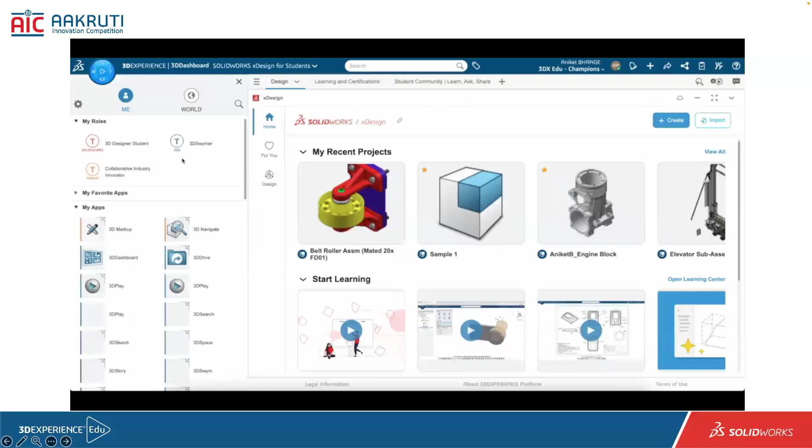To launch this, there's a simple step - just write down solidworks.com/xdesign/student and you will get to this page. You already have a granted license, which you actually get through Aakruti licensing. If you go to the campus, you will also see what kind of licenses you have. Just go to the dashboard and you will see SolidWorks xDesign for students.

When you look at SolidWorks xDesign, you have different tabs. At the very beginning, if you want to bookmark it, the short link will be created using this link - this is the SolidWorks student xDesign. Just copy this link and bookmark it.

You can create a new component by using this button, and import a new component by using this button. Here are the tabs: the home button, for-you button, and the Design button.

At the home tab, you will see the components you have created, and in the start learning section you will see all the learning content required to learn more about xDesign. If you open the learning section, you'll get more details on the right side - welcome to xDesign, start designing with xDesign, documentation, sheet metal, xframe, xmold. So xmold, xDesign, xframe, xsheet metal, xdrawing - this is a complete package of SolidWorks applications.

The benefit of using SolidWorks xDesign is that you don't have to install it - it's just a web browser, and I am using a web browser to demonstrate it to you. In the last design tab, you will see the components created by you only.

I'll start with a very small and basic assembly component. You've seen this kind of belt roller assembly - I'm just creating a belt roller assembly component for you, so I'm opening an assembly component. What I did is click on the component, and it has opened. Now I want to create a roller component on this one.

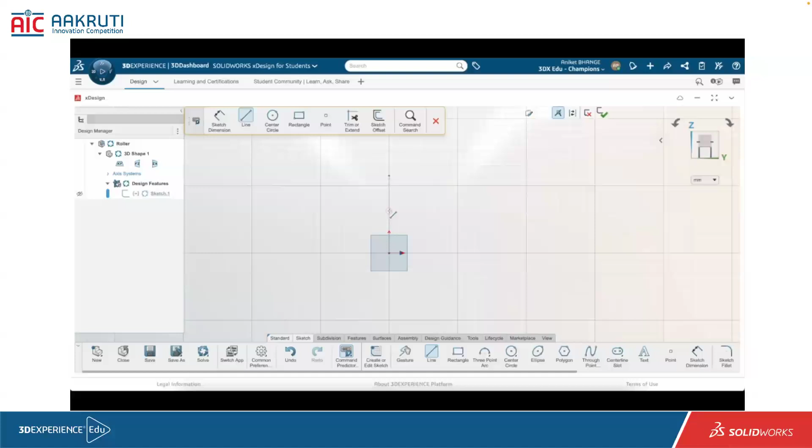Now I'll start creating my drawing. The internals will be like this, so I'll just click, click, click, click, and the end, and that's it. There are two ways you can use this click, click, click mechanism, it will just start creating lines one by one.

Now I have selected two lines. I want these to be collinear, so you can just make it collinear, or else you can drag the line and it will readjust its position. You can also drag the point and it will readjust its position.

The third command is you can add the dimension. For dimensions, I just use the right click mouse gesture button, or the command predictor is already available on the top side, which is showing me the sketch dimension is active.

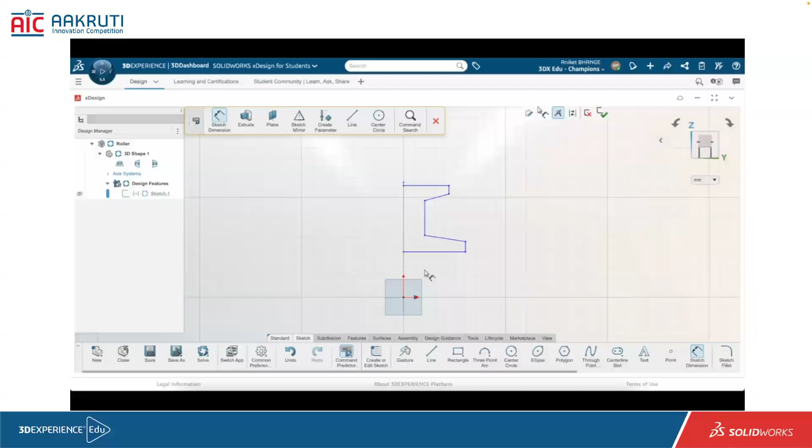So what I'm doing is adding the complete diameter. I select this point and this one, so now it is showing me the radius. If I move my mouse pointer to the right side, it will show me the diameter. So I know the diameter, and I'm adding it as 40 mm.

So once you add the first dimension, all the remaining sketches will automatically adjust as per the corresponding values. So this line is actually...

I have to give the center line for this from the dot, so what I'll do is put the line here and adjust the height as 12.

As you can see, as I'm adding the dimension, it is adjusting itself, and the lines are turning black, meaning it is getting fully defined.

So now I'll add this as 20. Then this is 15, so I'll go here and add it as 15.

Then this is 12, this is 15, then this is 30. Now I have the diameter for this one, then this dimension for the center to center I'm trying to set it as 8.

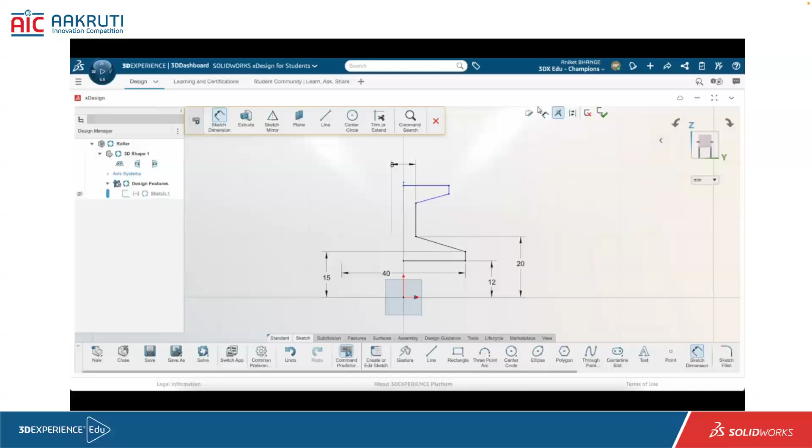Now it's time for this point. This is 33. Now I'll use this point to set a new dimension. I'll select this one, click. This one is second click and I'll add this as 35. So this is very basic operations, but still I want to show you how I am doing it.

And this is my final dimension as 38. Okay, so this line is still showing as blue because the dimension between this and this has not been defined. So I'll add this one as 9.

My sketch command is already done. Now I have to mirror this component. So I'll go check if sketch mirror is available. So yes, it is present. I need a sketch mirror command. I have selected it. Select the entities which you want to mirror.

I just moved over here and click OK. Now the sketch is done. I'll just do the exit. After doing exit, you can see that extrude command is already available over here.

So I click on extrude, but I want to use the revolve command. So what I'll do is I'll just click over here, switch extrude to revolve, and I'll select the axis, but axis is not created.

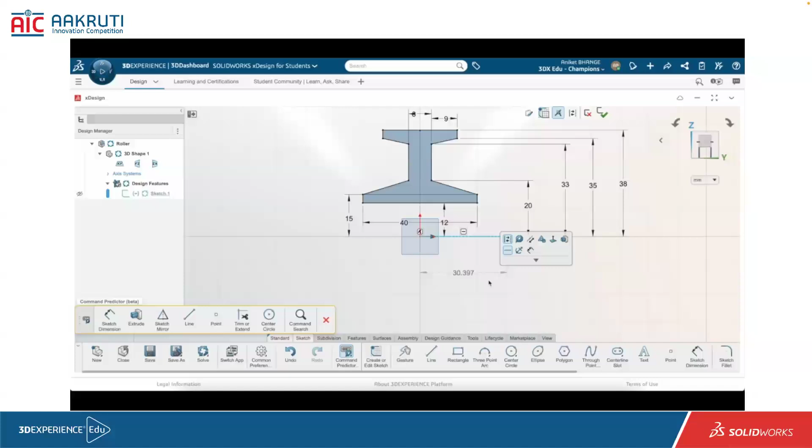So I go back to my sketch, edit it, and I'll put a horizontal line. Select the line and make it as a construction line. Click OK. Again use extrude, or you can directly go to features tab.

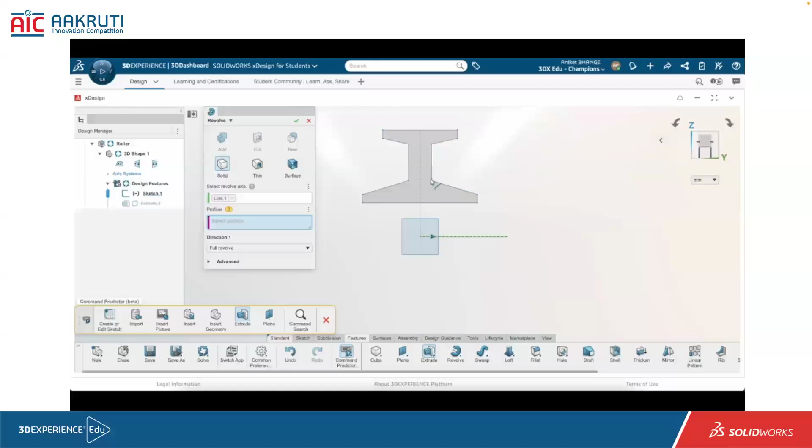In the extrude menu, here is a revolve command, but I like to use that extrude. So it's only a single tab, so I'll just go over here, use extrude and switch to revolve. Then I select the axis, then I have to select the profile, and the circular profile has been created.

So my roller has actually been created over here. So what I'll do is I'll do the save. I'll go back to my assembly. So going back to assembly, I just need to close the command, action xDesign, open the previous one.

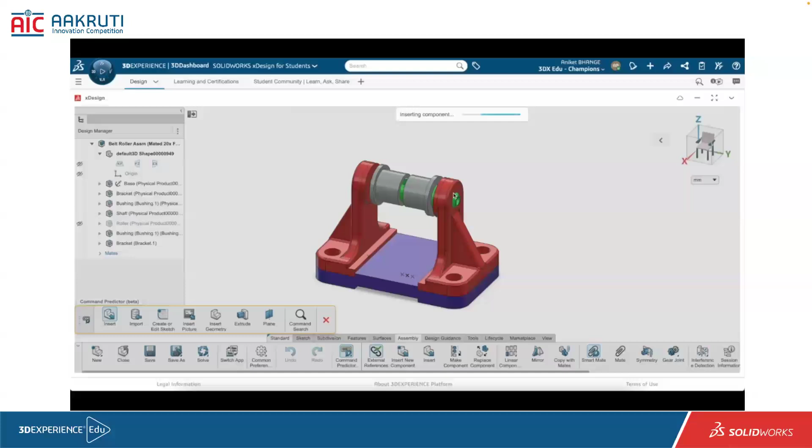So I'm opening the main assembly belt roller. Now I want to insert a roller into this, so I'll just click on the assembly, insert. After clicking on insert, it will show me the recent component. I'll just select my recently created roller. That roller has been generated.

It's here right now. So what I'll do is I'll try to move it a little bit to the left side because I want to check. Now I'll activate the mate command. So in assemblies, I'll go and click activate a mate. Select this one, select the outer one, then the concentric mate has been created.

Now I want to add a mate between this middle face and this corresponding middle face. So what I'll do is I'll just activate the center component of this one. The shaft has been activated.

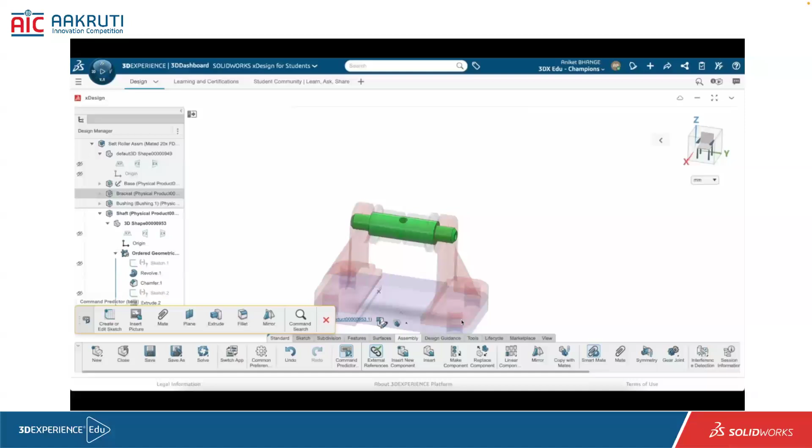Now I'll go to the planes, select this face, and I'm selecting this face. So two faces have been selected. The center geometry has actually created a plane for me at the center. This is the plane. So what I'll do is I'll just increase the height of the plane so that it should be properly visible when I'm adding the mates.

In this condition, you can see that this is hidden, this is hidden, this is hidden. Here are the options so that you can make it show all, hide all. So it will only show you which component you are working with, or make it translucent. So I prefer this one because I know I have to take some references.

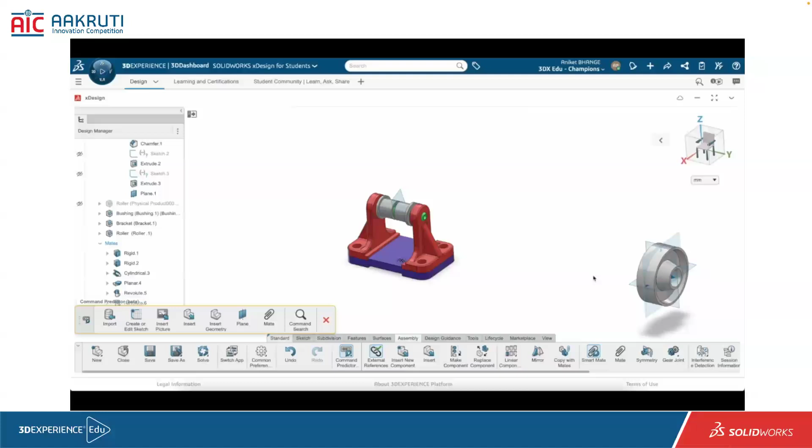So it's done. Now click on the mate, select the face and say concentric. The component mate has been generated and it's done. So within few clicks, the mates and assembly of the components is already done. And that's how you can create a simple component by using few clicks and the command help option.

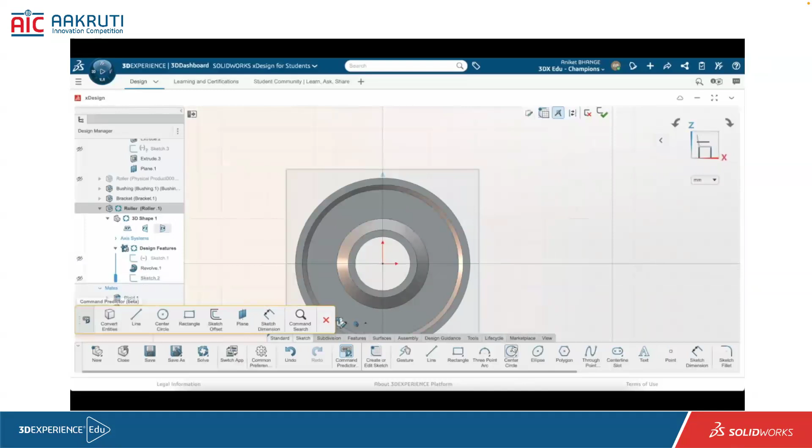Now we will move towards modifying this assembly into the assembly mode. So what I want to do is I want to create holes on this plane. These planes are a little bit bothering me, so I'll just hide all. I'll just select this face, select. I'll just create a sketch, circular sketch over here. I will add 8 as the dimension.

Features, exit the sketch, click on extrude. I want to do the cut, select the sketch and done. The extrude cut has already been created.

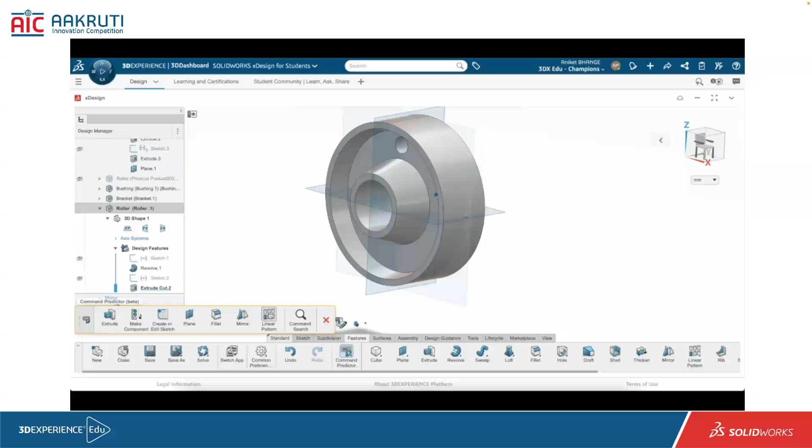Now the next step, I want to create a pattern. Click on linear pattern, but I don't want linear, I want circular pattern. So switch to circular pattern, select the feature you want to pattern. For the axis, I'm selecting this circular region, it's created. Now I want some more components to pattern, so I'm using 12. Click OK. Yeah, the holes are created properly.

Now I want to add small fillets on it. So what I have to do is just click fillet, select the edges. Now you will get the design assistance also. These are the AI components which are already there on the xDesign side.

So click design assistance for selection. I selected it, and it has selected all the 23 lines in one click. Click OK, click OK, so a 0.3 fillet has been added to all the components. Within a few clicks I have selected 23 entities and all the components are ready with me. Component is ready, I'll just exit and save.

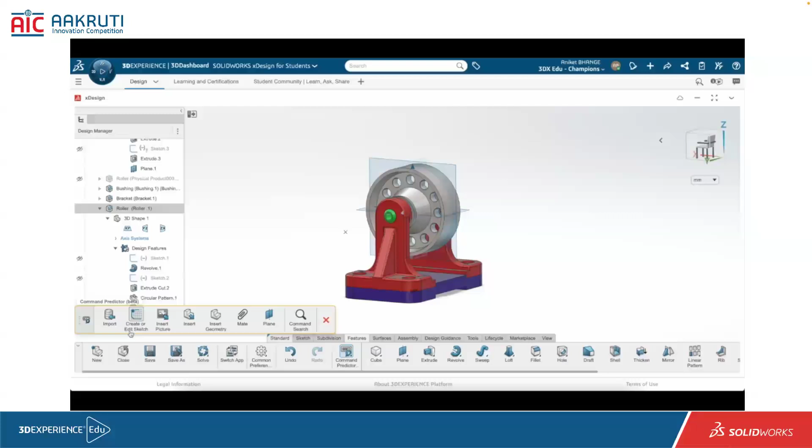So the belt roller assembly has been created. Now what I want to do is add fasteners over here.

But if you want to import the fasteners, you can just go to the tools. You will get part supply libraries from here. From the marketplace you will see the part supply. Click on the part supply, you will see the supply library on this side. You can directly search whatever hardware you want to insert into an assembly from this part supply library.

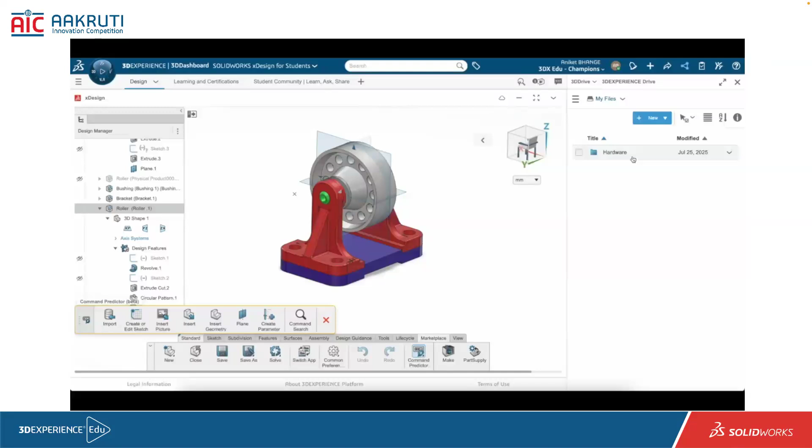Or another method I use is sometimes we have some of our old components with us, directly imported from the vendor's website where they provide parts and part details. So I keep those parts on my 3D drive and use those components directly from here, which saves me time searching for a component. Other than that, I know which company, which bolt, which nut I want to use, and it's already stored on my 3D drive.

So what I'll do is show you how to use an outside part in xDesign, so that if you have some SolidWorks hardware already created and with you, you can add it into xDesign.

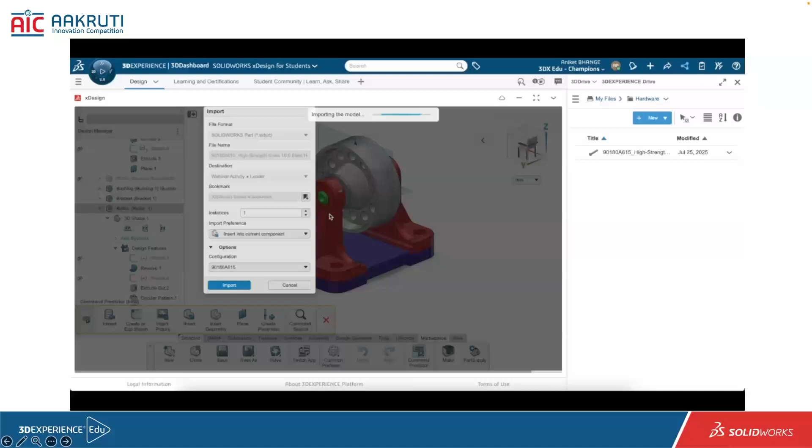So I have this hardware component, I've just clicked and inserted it. I imported it from some vendor which I want to insert. Here I have an option to insert a component into the current component, and I'll say yes, I want this bolt inserted into the current assembly. It is actually importing, storing it to the collaborative space, and the bolt has been imported.

So collapse this, and this is the bolt, just pull it outside. Now try to add the mates. What I'll do is select this one, activate the mate from my helper. I want a flipped orientation. It's done, I'll say apply, continue.

I'll select the top face, and I'll select this top face, and then say coincident. The mate has been added, the component has been added.

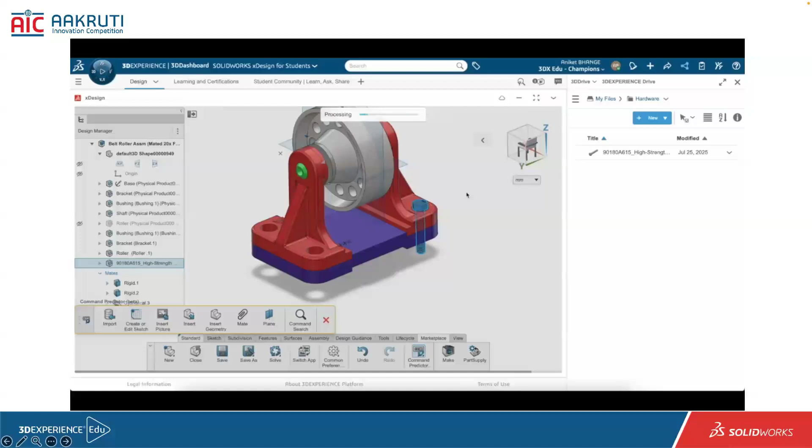So I want four of these components. We also have AI assistants over here for this. Just click here, select this short bar menu. What I did is I selected the component, selected the short menu bar, and the AI assistance is actually helping me identify where the components can be added. Yes, these are the positions I want to replicate, and these components have been replicated over here.

So this way, hardware has been added, components have been added, component material has been added. Next task is I want to add materials to my roller.

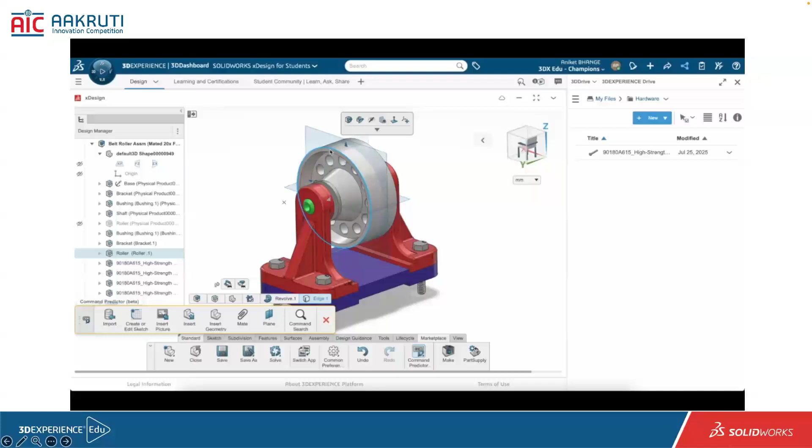So select the roller component, click over here, you will see. So this is the roller assembly for me. Now a lot of the planes are getting preference while selecting, so click the V button, it's a shortcut key, and hide all the planes.

Now I select this one. I don't see the mates materials over here, so I'll just go to the design tree and select the 3D shape, and try to add materials into it. Here are different types of materials already added into this.

This is my customized library, so you can see different kinds of materials. You can also customize your library and import materials into it. So I want to add a core material. I'll use a plastic material, so I want some sort of a PF material. I just clicked over here and say apply.

It is selecting the component, it is saying belt roller assembly. Component has been, material has been updated. Okay.

Oh sorry, by mistake I have applied it directly to the component. Now I want to add it to the build design feature, and click OK. The material has been added.

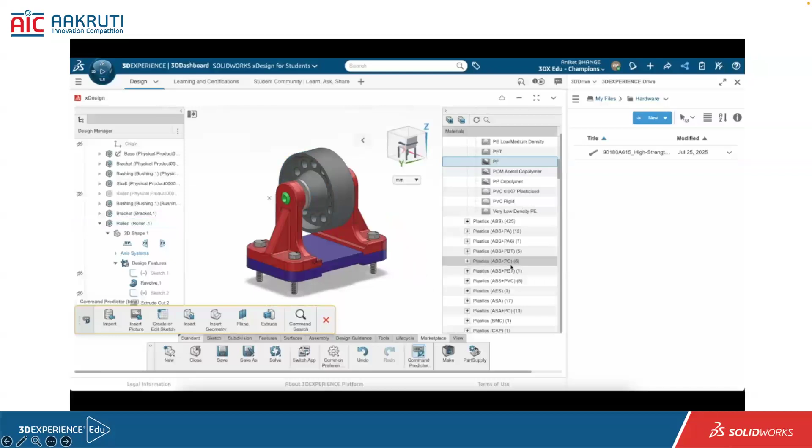So why was the material showing these kinds of options? Because the roller component is not active, I am in assembly mode. So once I activate this, if I change the material and use a different kind of material, like red or yellow, I'll say polished yellow, high gloss plastic, and click apply. Now it is directly applying to the roller because the component is active. Previously the component was not active, that's why it gave me multiple options, like whether you want to mate with assembly or with design features and other things.

Now the roller component was active, that's why it got replaced directly. So your assembly is ready.

You can share that assembly to the collaborative space directly on the 3DSwym community. If you want to share this with your friends, family, or your team members who are working with you, you can share the collaborative space with them. All the data files will be added in your collaborative space, and they can also work with it. So it's a kind of collaboration.

If you want to share it to the community also, there's a button for that command. Click on share, and say you want to share this to the external community where your team members can see it. You can share it to the community as a file, either view only or editable mode. In editable mode, users can download the files. Select whichever options you want, say continue, and then you will get to select which community you want to share it with. If you have multiple tenants, you can also share it to different communities this way.

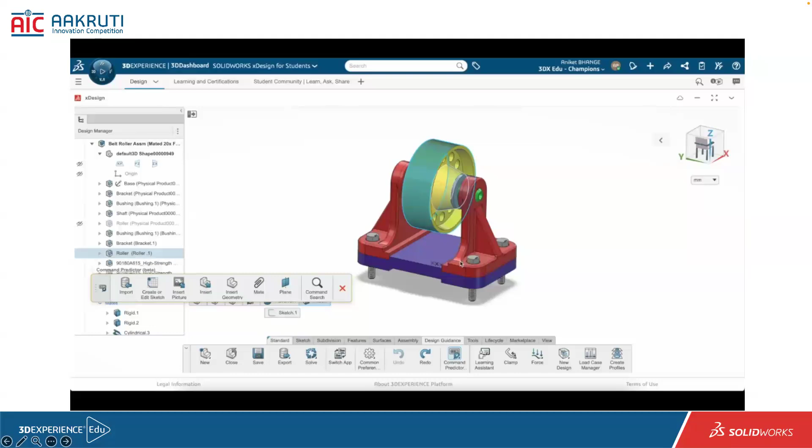If you want to do 3D printing with the components, say I want to 3D print this roller, I need an STL file most of the time. So we have a tool to do the 3D printing adjustment from here, and it will give you an STL file accordingly. So here you can see the 3D print option.

It will ask you which plane is the base plane, so I'll use this as my base plane. You can add your printer if you have one assigned, adjust the layout, analyze and show the layers, and it will display the layers for you. Then it will show the areas where support is needed, and it will also do the DFM checks.

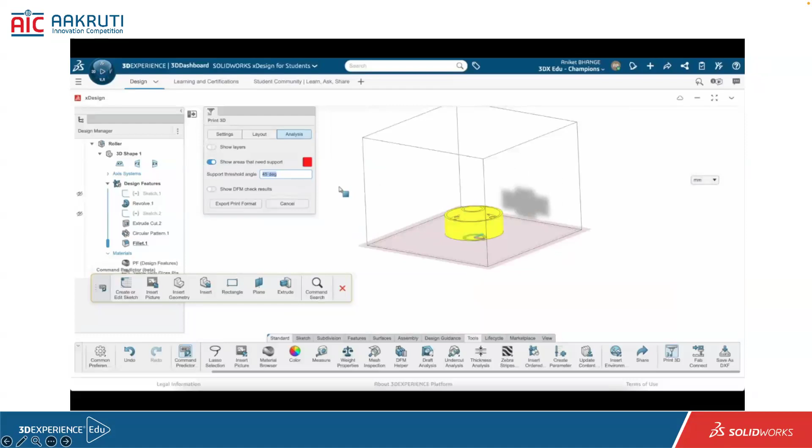If you are doing DFM checks like clearance and wall thickness, these are the areas that need support. So I export in print format, and when you do that, it automatically moves to the STL format. Now I have an option for what kind of resolution I want: fine is a very fine resolution, coarse is a coarser one, and you can see this on the preview images. The last one is a custom option, where you can set deviations for your part. I'll prefer the fine one.

It has a correct combinations. I'll do the export and it will start exporting the STL file. So this is how you can generate your STL file. It will be downloaded and this can be used for 3D printing.

Now this button is actually to access between different kinds of sections over here, and this is how your xDesign is actually working.

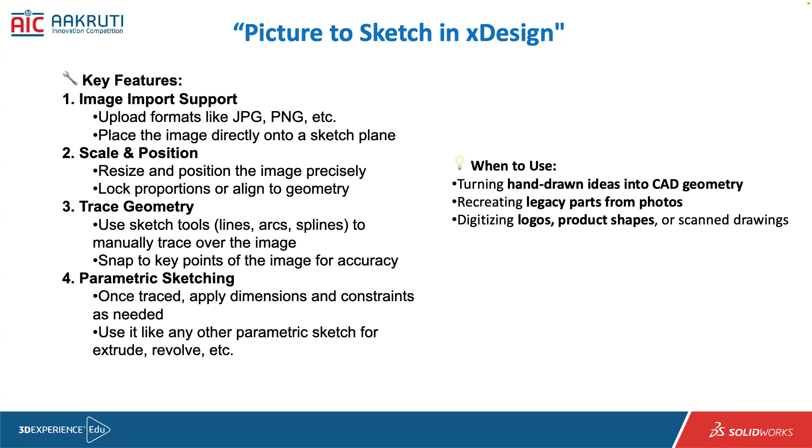So that is the new tool which is introduced in xDesign. Let's see how that tool will work. That tool is also used to create your logos on your part. So if you have your logo and want to create a sketch out of it, you just have to import that logo image, place it into one part, convert it into a sketch, and use any feature you want. Let's see how that tool will work.

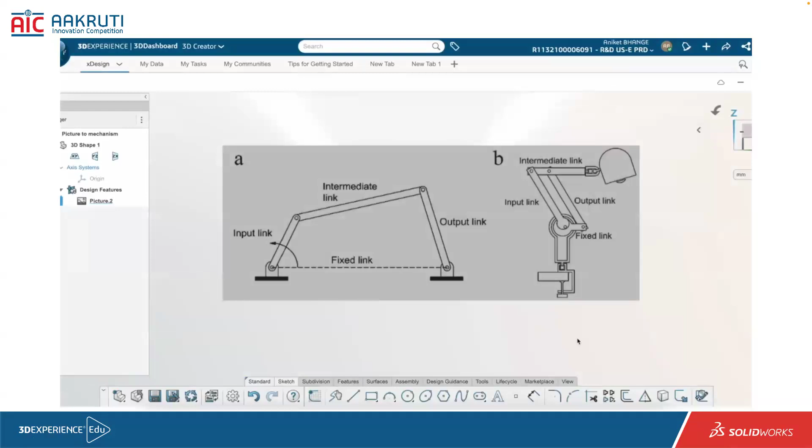So this is a 2D mechanism. I have two different mechanisms and I'm explaining how these mechanisms can be converted into sketches. In this part, we have a very interesting situation where we have a 2D mechanism created. I have images of a 4-bar mechanism. Now I want to convert this into the sketch and the mechanism, and proceed with that.

So xDesign has a very interesting tool; it will convert your sketches to the mechanism. What I did is I went to the tools section, insert picture, selected the plane, and inserted the picture over here. Now go to the pictures and say picture to sketch. When you use picture to sketch, click on the 2D mechanism.

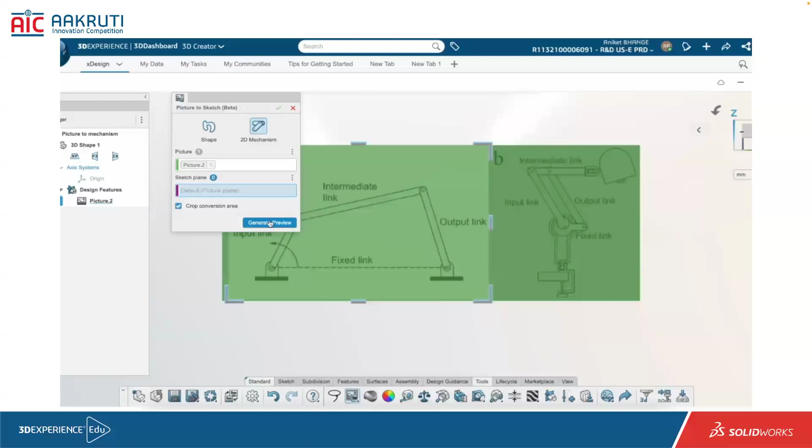There is a default plane for the sketch, but I want to use the same plane, so I will just crop the area. First I'll show you the left side of the sketch. So I'm limiting the preview generation. Then once I click on generate preview, you can see that it has created the 4 bars of the mechanism. The first one is the fixed one.

So this mechanism is what I need, so I click OK and the sketch is generated. I'll hide my picture. And if you see, this mechanism is actually a moving one. So you can create a moving 2D mechanism using simple images or sketches. But this tool will not work for a lot of complex theories; for simpler ones it will work.

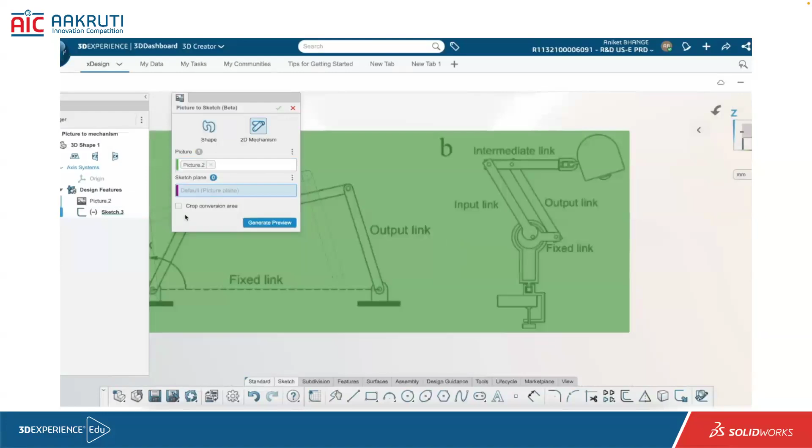So we will do it similarly over here: click 2D mechanism, select the picture, then we will have a crop area. In this section, the most visible mechanisms will be converted, and other mechanisms we have to adjust, but this tool will be very easy and effective to generate references out of it. See, this reference and this reference have been created. Now it's very easy for me to proceed with multiple references accordingly.

So this way you can use your images to convert into the mechanism, and these sketches can be converted to the final parts. So this is how the sketch to mechanism tool is working.

Okay, so that was a short introduction on how the sketch to mechanism tool is used. Now we will move towards a very important part.

While doing assemblies, you know how to add mates, as you are using SolidWorks or CATIA, so you know the basic mate components. But I want to go a little deeper on creating mates and components in xDesign. In assemblies, sometimes users make small adjustments, and those are the external references. What xDesign tries to maintain is that if you update one part, the second part should also get updated. That is called an external reference. But in those conditions, we have some restrictions related to those parts' relations.

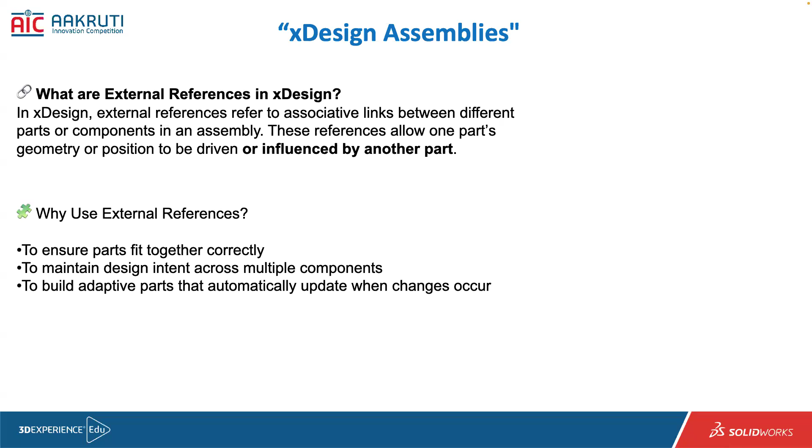In this video, I'm trying to create one bracket component on top of this elevator assembly. Let's see how the external reference will be helpful while creating those kinds of components. In this section, we are going to create some external references on the assembly part and component, and look into the mistakes we should avoid while working with assemblies when using external references. In short, what is the external reference in xDesign while using it?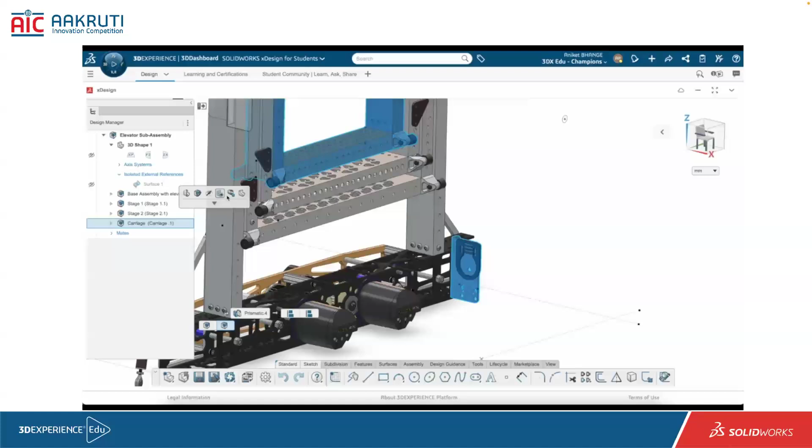So I will press the V key to hide all the planes right now so I can show you. This is the component which I am working with right now. This is the complete assembly. I'll open my carriage component only. So the carriage assembly is open. I want to first add mates for this component.

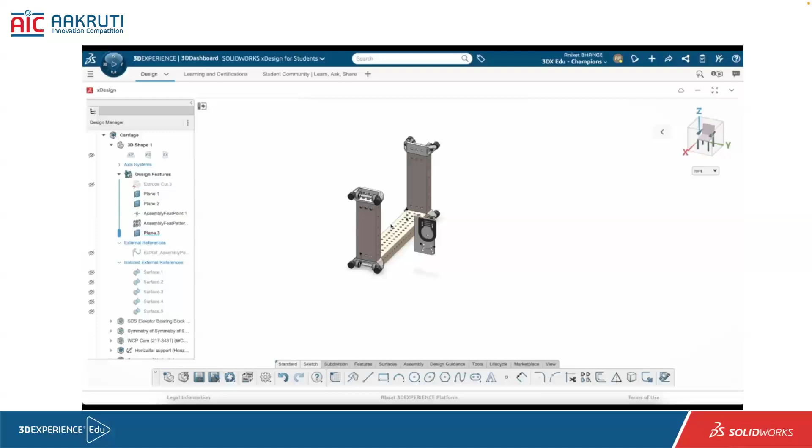In the design guidance, I will open the command predictor so this will ease my speed and give me a bit more speed to work with the component. Now as we have to add mates, click on mates, select the circular region. Edges are not allowed, so we have to select the faces most of the time. Select the first face, select the second face. Here we can add the concentric mate.

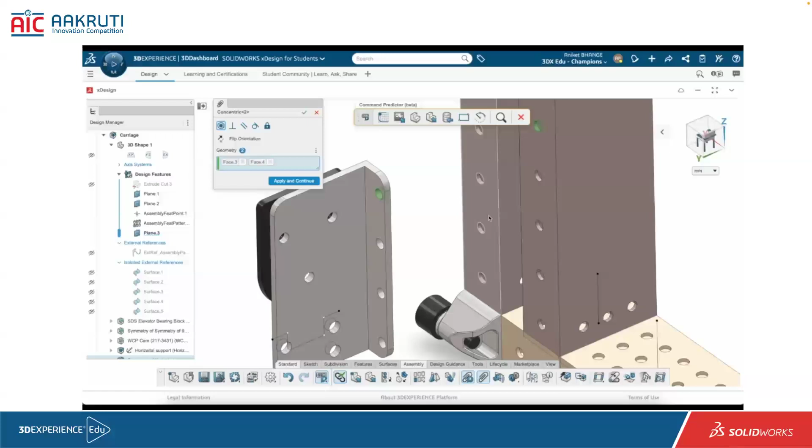So I have a duplicate component over here, this component has actually pulled outside. So what I will do is hide this, I'll cancel this one. I will hide one component and do the fix for this component. Now this component is fixed.

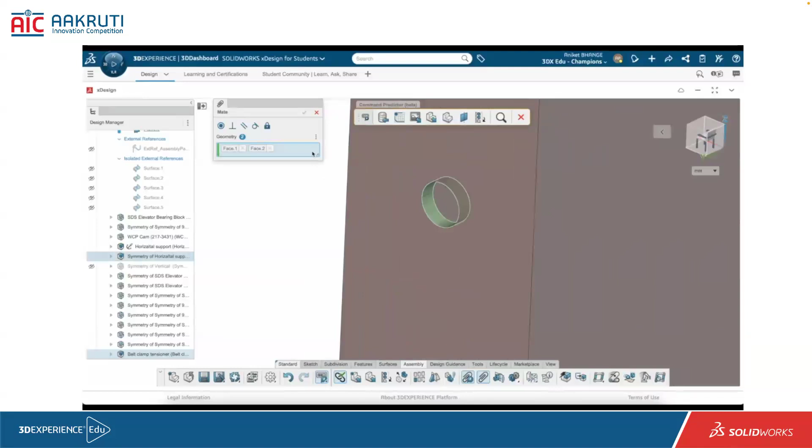I have to mate this component with this component. There was a duplicate component which was pulled out, so I made some changes and made it hidden. Again, start with mates, select the circular faces. Do not select the edges, properly select the faces so you'll have a proper mate selection. Apply, continue, then select this face and this face and add the coincident mate. This mate has been added, so two positions have been locked. What I'll do is lock the third position by adding a mate between these two, and click OK.

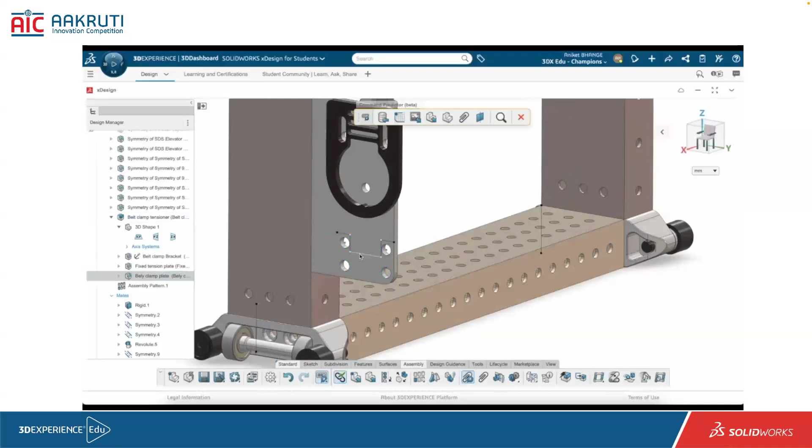So in this assembly we have a lot of different types of components. What I want to do is add a belt clamp tensioner on this one. I'll just go here. This is a belt clamp tensioner component. This is the belt clamp plate, which currently has a sketch over there. I just activated the sketch. I will click on show all because I want to show you how to take the references.

If you've seen, this line is blue and all these lines are black. This sketch has been generated, so what I'll do is generate more sketches. I will take this as a bottom reference, and I will create a line from this one. So this line has been created, this is the component.

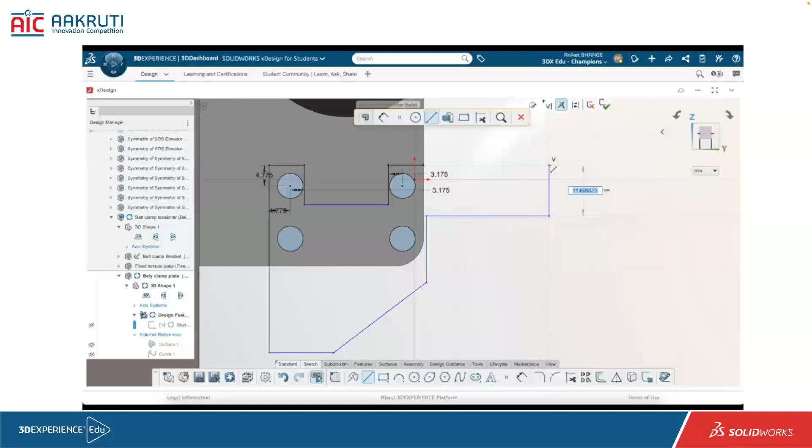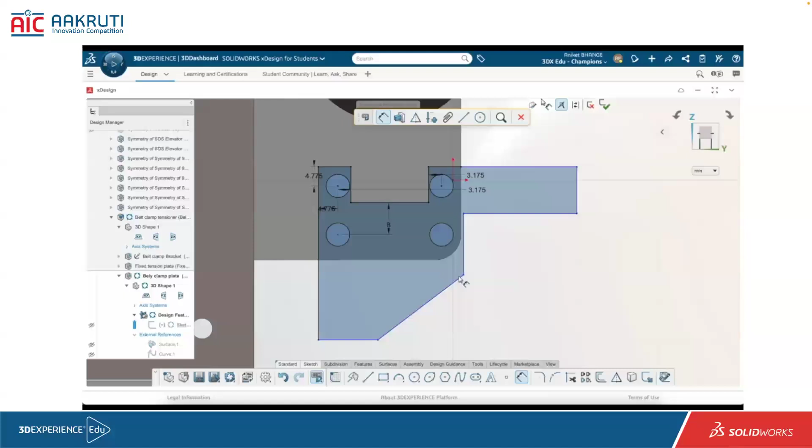This component has been created. Then let's go with the dimensioning. I'll add this as 8 mm. This becomes blue. Then from this dimension to this dimension, I'm adding it as 25. This dimension is 10.

So if you see that line is not horizontal, it's actually not correcting. So I'll just update once again.

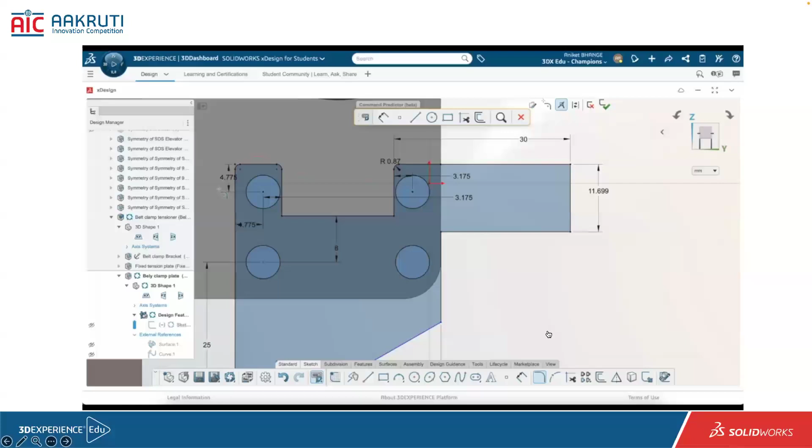So dimension has been added. Now what I'll do is add a fillet. I'll go over here and draw the fillets on these positions. I'm selecting the fillet and trying to move it around. The fillets have been created.

Then I will add dimension to this line so that it becomes fully defined. Now one fillet is remaining, this one. There's an error on the fillet - by mistake I clicked on the circle, so that fillet was rejected. I will increase this to 3 mm. The component has been created. Now these two fillets are also created.

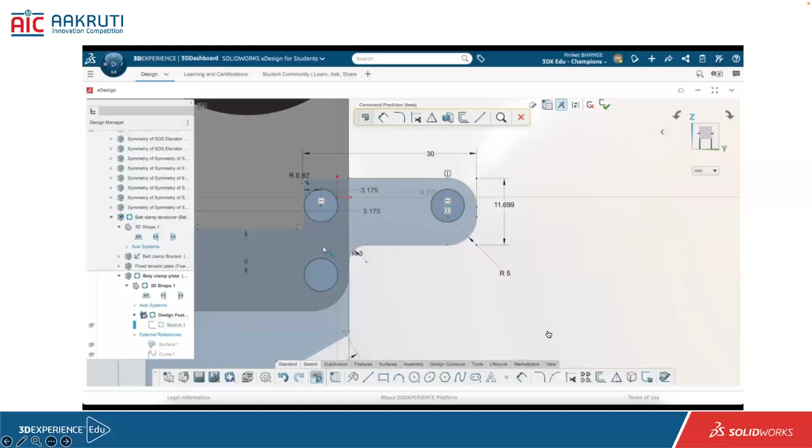Now I want to add a circle, so I'll use this position, and I'll make sure these two lines are on the same side. Then these two circles are equal, and the position for this one is in line with the top, so now the sketch is fully defined.

Go to exit sketch and say extrude, click. I will add it as 15 mm. Sorry, this is 10, so this is looking a little bit big. So this component has been created.

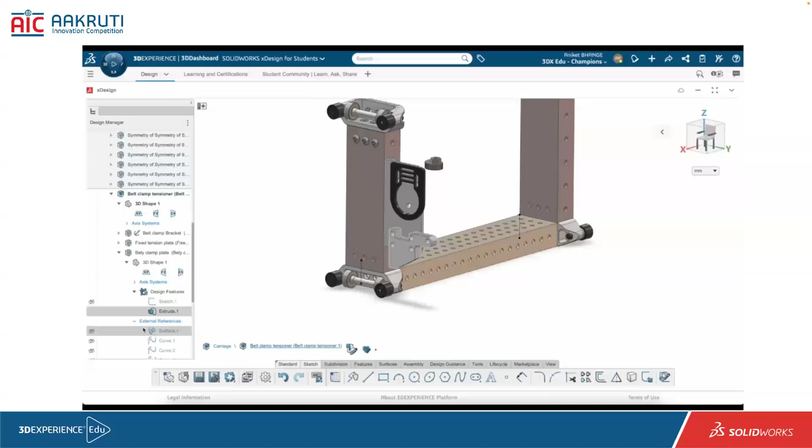You see that these external references have been created with reference to the curves. So what is the use of this external reference? Once I drag the component out and click on the solve button, this component gets attached to its original position due to these external references. So once we have any kind of external references, there is a thumb rule: do not add mates with something else.

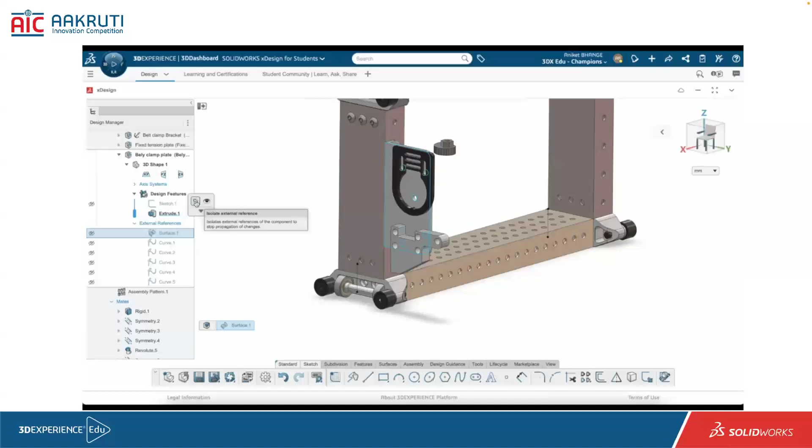Like, I want to move this component to this hole - don't do that. If you want to do that, you have to activate the same component again, click on the external references, break the external reference, isolate it, and then you can freely move this component around. So currently the external reference is keeping that component at the same position. Whenever the component by mistake changes position, the solve button will actually solve it and reattach the component to its original position.

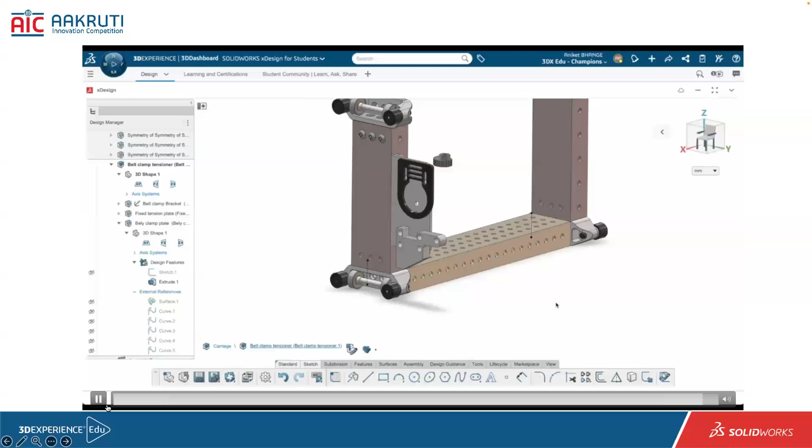So think of it as if you are using CATIA application. In those applications also we have this kind of external references. These references are used to maintain the geometries along.

In this section we are going to - so what happened is that we have created an external reference, and that external reference is keeping that component in position. The reference which we have used is related to that hole component, the circular region, and if we change the dimensions of that hole, it will automatically update into the part. If the part is actually attached, it's kind of creating a mate between two components.

And if you want to move that component from that position, and it has an active reference, just break the reference and then you can freely use that component. So in this way you have to maintain a proper relationship if you are using a top-down approach while creating an assembly.

That's a simple method to avoid any kind of mistakes while doing a lot of complex assembly. If your assembly is growing, and more and more components are getting added to it, in those conditions this will be very helpful for you.

Next we will go with the conditions where we are adding a gear mate. We have all kinds of mechanical mates into it. I'm showing a small assembly of gear mate only. This is the section where we will talk about how to create gears and how to create a gear mate.

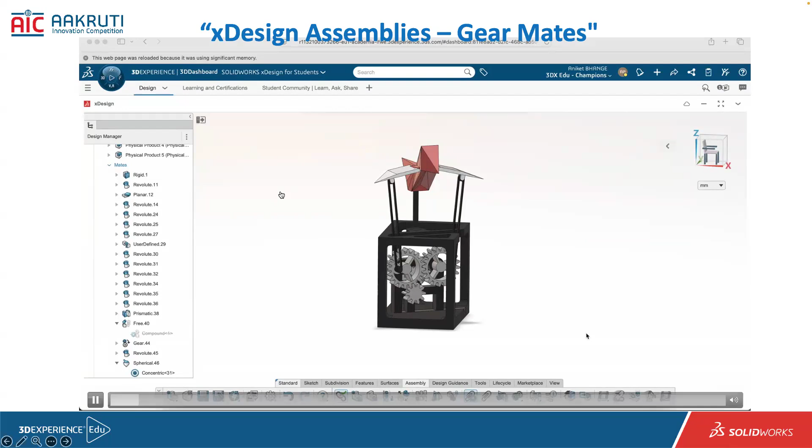I have a component created by using a gear mate. What I will do is show you how easy it is to create a gear mate over here. This is a webinar, so I don't have a lot of time to explain more details about the mates and how the functionalities work.

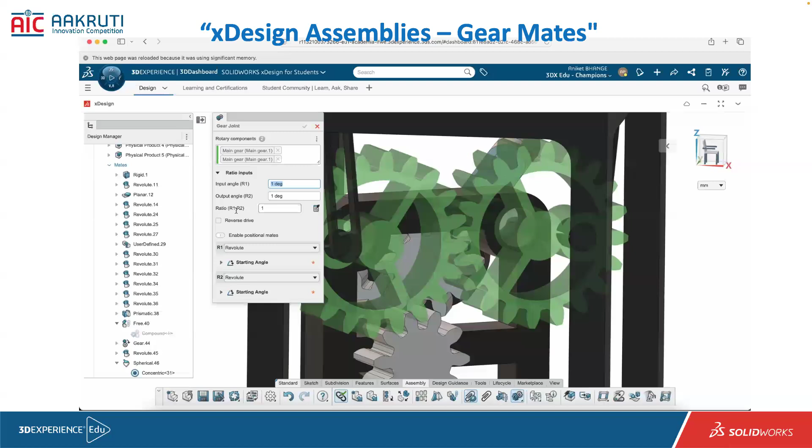If you want to change the ratio position, you can change it from here. You can input the calculation, or calculate the ratio using this, and it will calculate the gear ratio for you. Then you can enable the position, and also add the starting angles and starting positions of the gear. So all different kinds of options are already available here.

In this video I don't have a lot of time to explain each and every option, but this is the basic: when you have gears, just select the two components, add the input and output gear ratio, and do it. I will just unsuppress my already assigned gear mate.

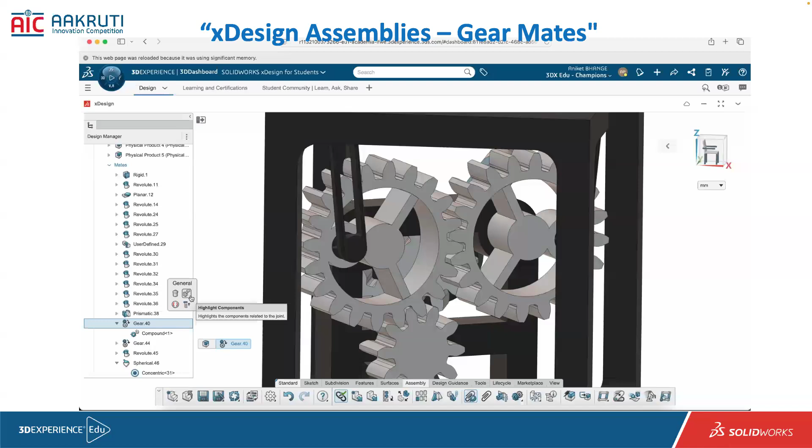After adding a gear mate, once you edit it, it will look like this: 1 degree, 1 degree. So the input and output ratio will be displayed in this edit mode. You can also go to the gear mate position, and here it is a highlighted component, showing you on which components the gear mate has been added. You can see these are the components affected by the gear mates, and all these components are highlighted.

This command will also work for all the different types of mates. For example, if I want to check which rigid mate is between which two components, it shows it's a component between this bird and this box. So this is how the mates have been added, and you can also check which revolute mate is there, and which component and assembly is already assigned to it. You can click here.

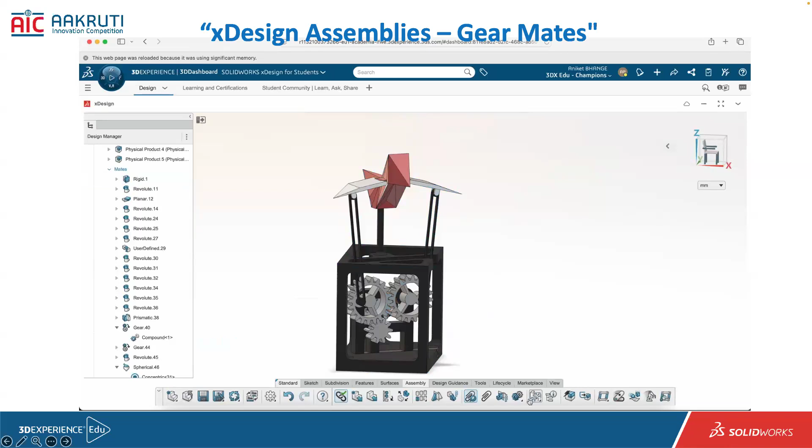You can also create a new assembly, make a flexible assembly, and create an environment out of it. Then this is a rigid mate. In the next video we will see how the environment will be added to it.

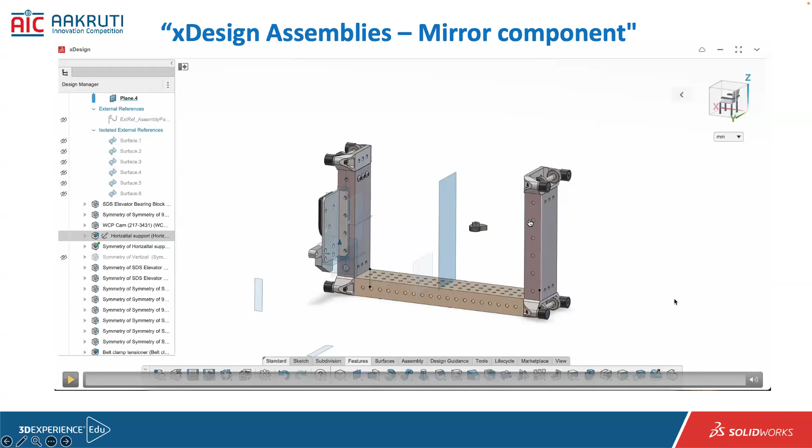Now in this section we will be looking at the mate, symmetric mate, and mirror component. Go to the assembly tab and click on mate mirror components. So here are the mirror components.

Once you mirror, select the plane, then select the component to be mirrored. I want to mirror this component, and the component is getting mirrored. Then create a symmetric mate, so it will create a symmetric mate along it.

That's how we do the mirror of the component. You can see all the components actually getting created. The symmetric component has been created here, all the components, and you can see the symmetric mate is also getting created. That's how you will do the mirror components.

So that's how you will do the mirror component, that's a condition where we are doing a mirror component. So the next one I'm trying to show you is the last video.

In 10 minutes I'm creating one part, and in this part I'll guide you on how easy it is to use command predictor and selection helper, those two AI components, to create a small component in xDesign. I will show you a very short video to create one component, add a fillet, add a rib, add component positions, everything. So let's start with this video.

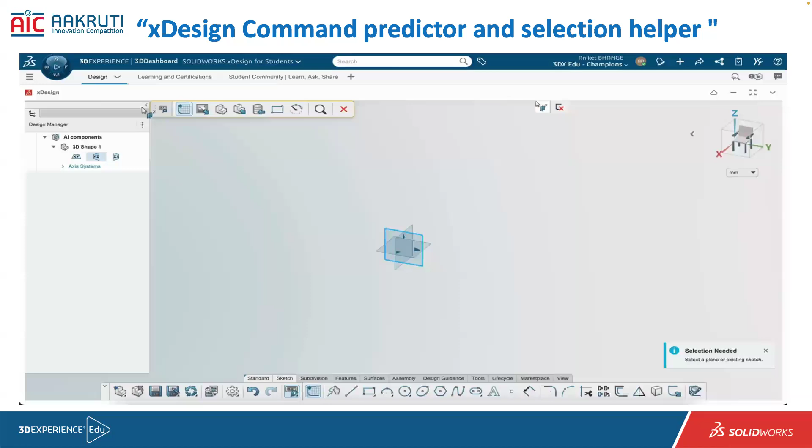From the command predictor, I'm just selecting the line, using only one action bar to recreate everything. So I'm just doing the line creation, escape, then I create another line. This line should be part of this, and so this is now the center line.

Now I will add the end-to-end dimensions. From the command predictor, I'm directly adding the dimension, 100. This dimension is 40, and the height will be 20.

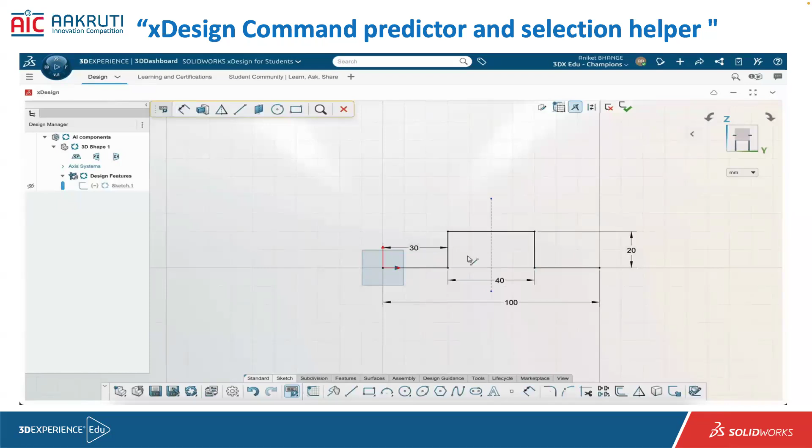Okay, so everything is ready. Now I will go with exit sketch. I'll go with extrude. I'm selecting the sketch from the design tree.

I'm using the thin geometry, and I will reverse the thickness on this side. I need a thickness of 4 mm, and this will be the 50 mm, so I'll go with 40 mm part. Done.

I will click OK. This is done from one side. Now what I'll do is I'll create some geometries on this one. So for reference, I will put a line over here. I'll convert this into the help selection line.

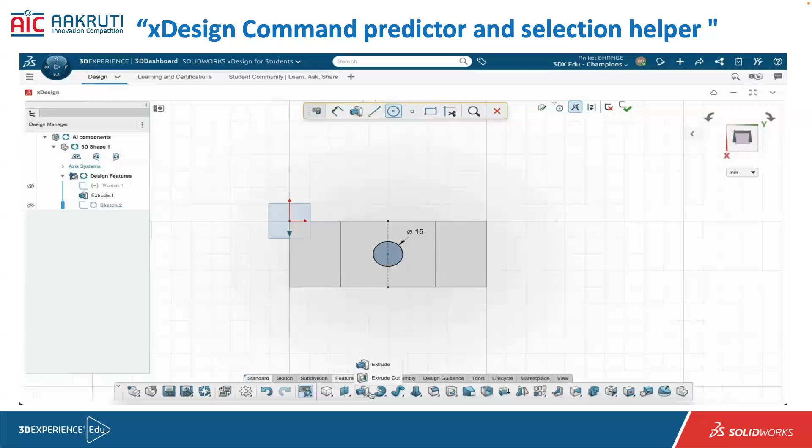Now this is for the hole, so I'll create a hole of 15. Then go for feature, extrude cut. The cut is done. Now I'll again select the face, select it, and I'm adding one more, so it will

again snap it. So it's very easy to snap. Escape, select this one, and let's convert entity. Now features, do the extrude, and I want this to be 15.

Done. Now I want to add a rib on this one. So for the rib, what I'll do is I'll add a plane first. So command predictor is active and it is directly showing me the plane. So select this plane and this plane.

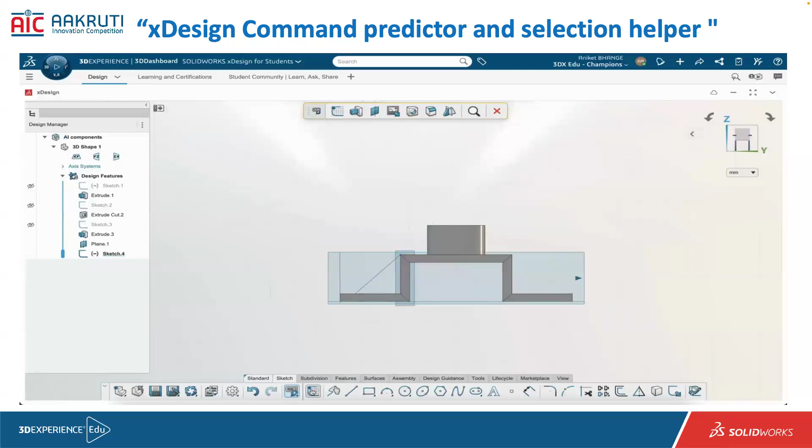It will give me a center plane, and on this center plane I will just start the sketch. I'll put the line, click OK. Now go to features, and here you will get a rib.

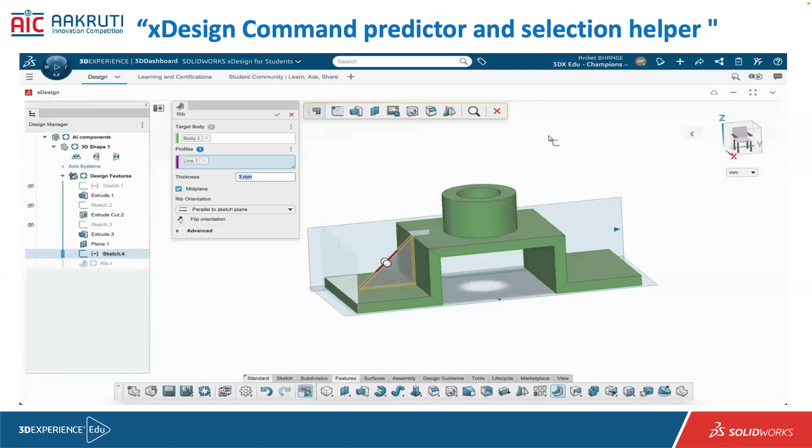So target body, rib profile has been done. Switch it to the parallel to the plane, and done. So rib is generated. So what I'll do is I'll do the mirror.

For mirror also I'll need a plane. So just select this face. Instead of this one, I will select this and this. So the new plane has been created.

Now what I'll do is I'll do the mirror. So I'm using all the commands from the top side, command predictor. Now mirror plane is here. Now I have to use the features to mirror, so I will use this rib feature to do the mirror, and click OK. Rib is generated.

Now most of the things have already been generated. Now all the features are generated.

Now I want to use fillet to show you selection helper. Select this face, add the fillet. You will get this power button. It is called as a design assistant for selection. Click over here, change the fillet to 5, select OK.

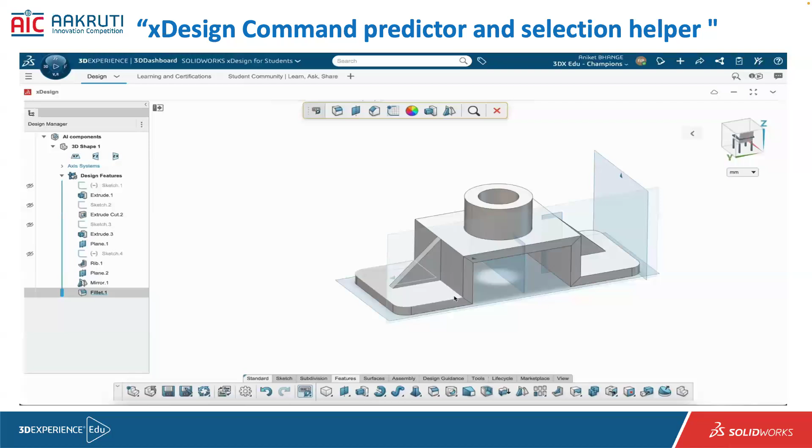See that all the four corners are now getting filleted. Click OK. Now I want to use this face also as for the fillet, and click over here. See that it is automatically getting predicted like which line should be matching to the current selection. The fillet is generated. Now I want to use this top as a fillet section, and all the lines are getting properly filleted. So this fillet is already done.

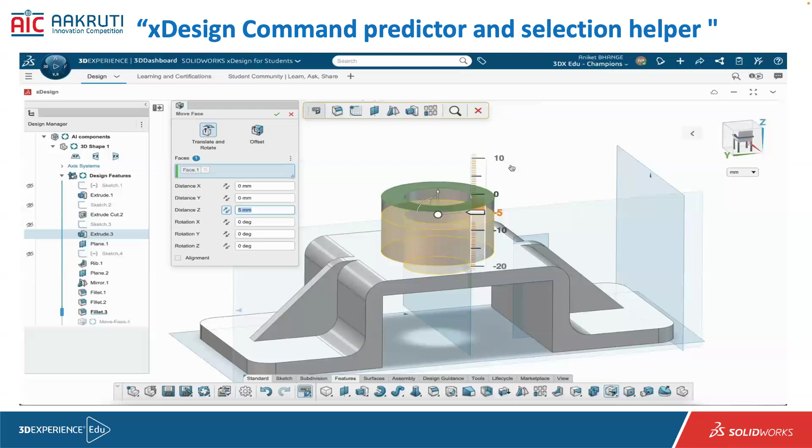Now I want this height to be reduced or extended. So what I'll do is I will use move face command. Whenever I use move face command, if I want this to be from 5 mm minus side, so I'll just drag. So this is 5 mm, release, and OK. So this face has been shortened by 5 mm with only one click, and it's done.

Now I want to add a fillet over here. Just go from the shortcut menu. We have added a fillet. So all the things which needs to create this part is already done and generated. So this is how you can use that command predictor, then selection helper to create a part.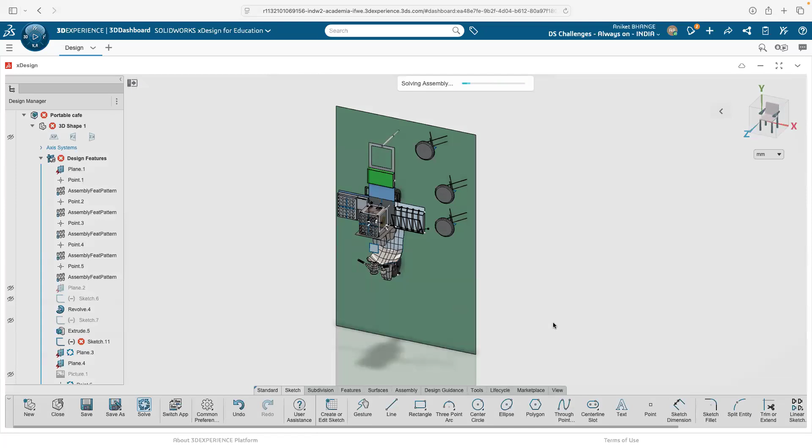SolidWorks, yes, it is available, but Sketch to 3D mechanism is not available there, because Sketch to 3D mechanism right now is actually powered by our AI technology. So it's available only with our CAD tools.

What is the format of the final model? The final model will be in 3D XML file format. But if you want to use that file format in SolidWorks, you have to launch SolidWorks from the applications, go to the collaborative space into the SolidWorks application, and open this same component there.

If you are not able to find XDesign, please contact our team, they will definitely help you. We have tutorial videos available on this home page button, where all the tutorials related to XDesign are already available.

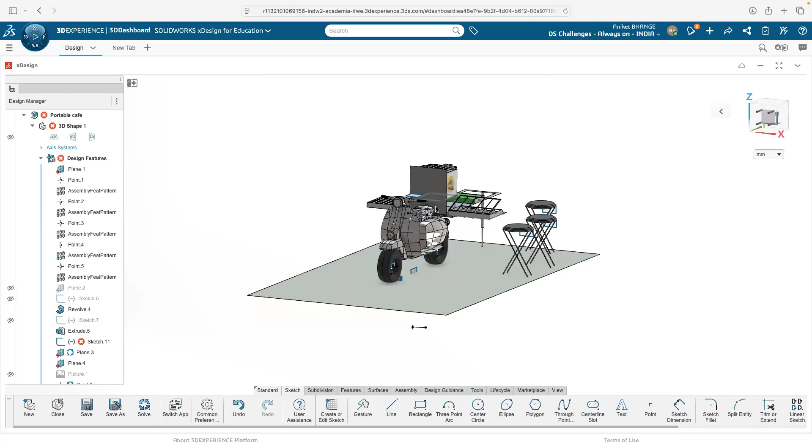If you see, this kind of organic shape is not possible using our parametric modeling. So this is a completely parametric geometry, and this is organic geometry created by using Xshape.

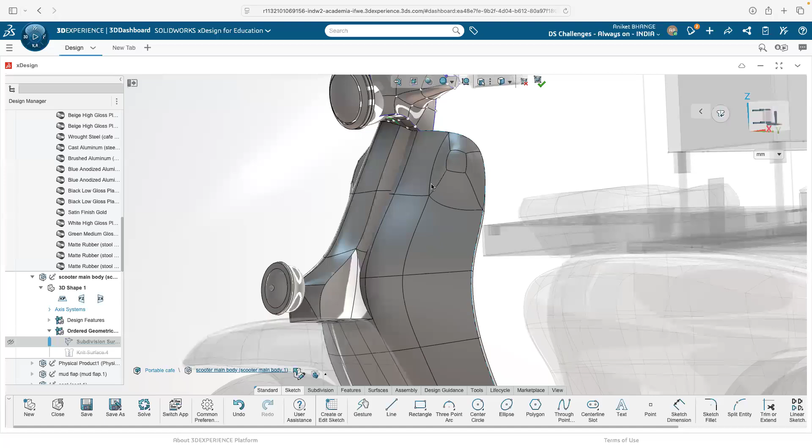If I expand this, this is my subdivision body. This will create an organic shape, cloth-like structures and other things, and that can be managed into this component. But this will be a little tricky, because if you need constant motion while creating fabric, that kind of motion I cannot give you.

But for textures, you can use this kind of Xshape geometry, select the points, and regenerate the textures out of it, so that these textures will help you create a different kind of complex geometry. This way you can create organic geometries in Xshape, and that tool is available on the xDesign side.

Aniket, there is one more question: Is there a maximum storage for the XDesign drive? Any limit for the storage?

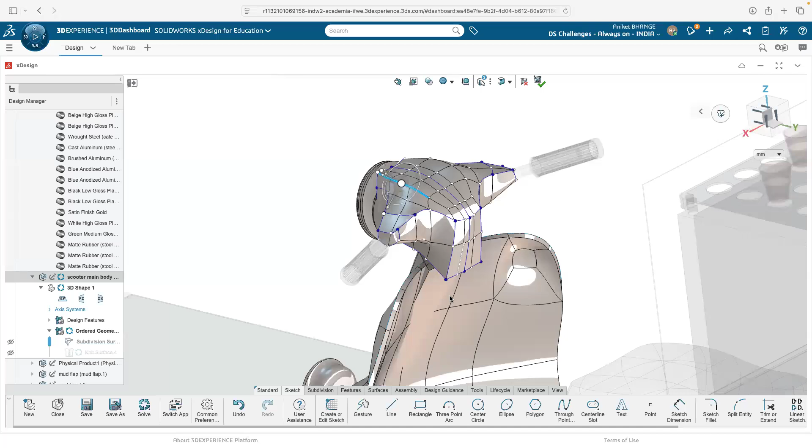You will not hit that much, because currently this big assembly, which has all the components, is actually around 50 MB. We have a lot of storage on your tenant, which is the location where you are currently working, and this is managed by us as a DS member. So we have a lot of storage, don't worry about it. You can create as large as possible, and we will handle it, so that's no issue.

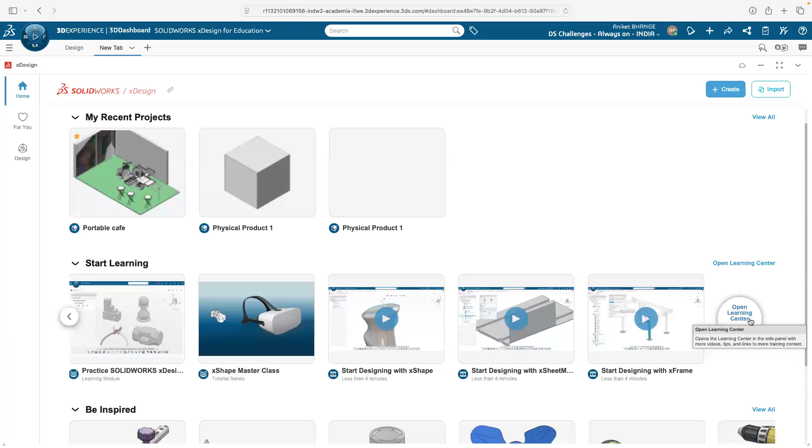There is one question regarding the training manual and the drawings and diagrams used during the presentation. Training manuals are available on this Learning Center. The content I'm currently using is not available, and I'm not able to share those 3D files, but I'll share the learning content files. If you want to create drawings and other things, you can go here where all the training manuals and contents are available.

Apart from this, I will post more videos related to XDesign applications on our community as a series, a web series. We will go one by one and post as many questions as possible.

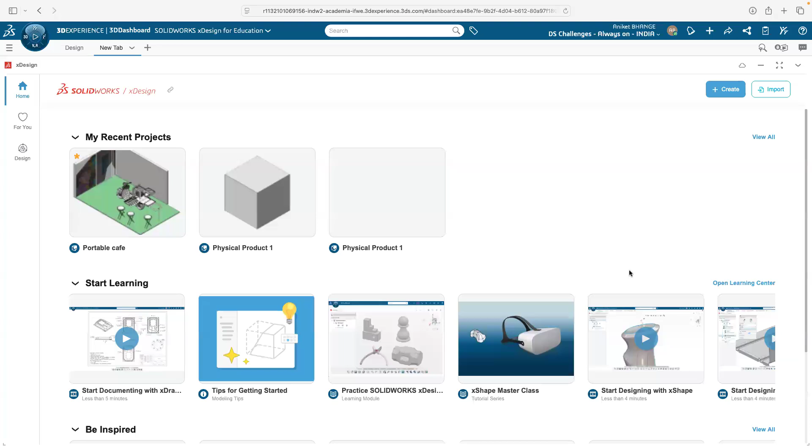As we move toward the future, where we need to design anything with any device, XDesign is moving forward. XDesign is not a different tool; it's part of the SolidWorks and CATIA applications portfolio, because whatever you create on XDesign can be opened on SolidWorks as well. So if you create organic shapes on X Shape, you can open it in SolidWorks. That's how the content has been created, and most of the contents are right now available.

This is a new tool because these kinds of shapes are not possible on the SolidWorks side, so XDesign will complement you there. For organic shapes, you can use X Shape, and for other things, if you're more familiar with SolidWorks, you can go with SolidWorks, or create anything on XDesign and pull it into SolidWorks for complex modeling. So you can use it in a combined, collaborative way between two different applications. All this content we will post on the community.

There is one more question: Can we design electrical components and coils on XDesign?

We do have that application, but I don't know if it's currently active for you. I need to check whether that application is active for you, because we have electrical designing capabilities, but whether it's active for education purposes, I need to check, since in your current licenses that application is not visible. For XDesign, we have electrical routing, PCB modeling, and PCB design capabilities for commercial uses, but for education uses, I need to check.

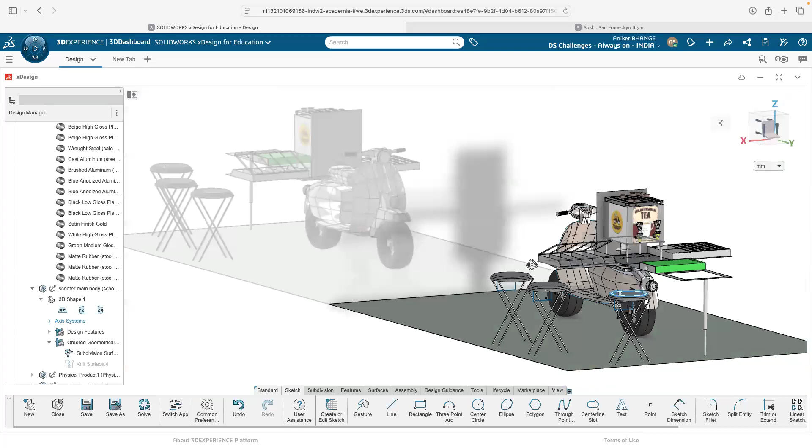One more question: how to open SolidWorks files on XDesign? You have to go to your collaborative space, the 3D Space. Once you open your 3D Space, search your component there. I can see multiple components, so how to filter it? Click on the 6W tag and search for SolidWorks.

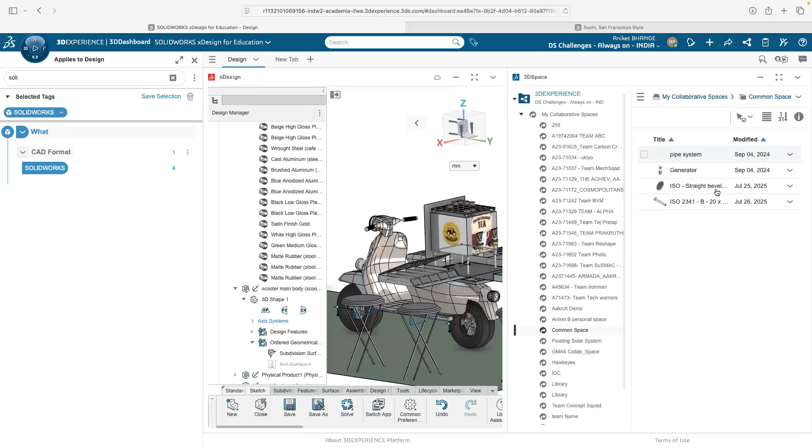Here CAD format will be the tag. Select SolidWorks, and only SolidWorks components will be visible. These are the components which are actually stored using SolidWorks onto the common space or the collaborative space.

Directly drag this one, place it into the section, and you can insert into current component or open component. So I'll insert into the current component, like someone has created a generator component, and here you can see the SolidWorks tag is available. That's how the SolidWorks component works.

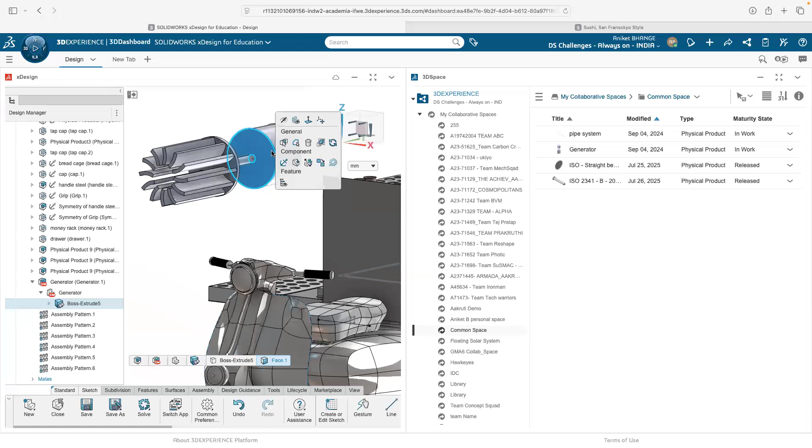But one thing, you cannot edit these features because this is a component of SolidWorks. So you cannot edit anything here, but you can use the references, like using this file to do mates or create geometries along it - that kind of collaborative work you can do. But if you want to edit this, go back to SolidWorks, edit the geometry, come back here, and it will automatically get updated into xDesign.

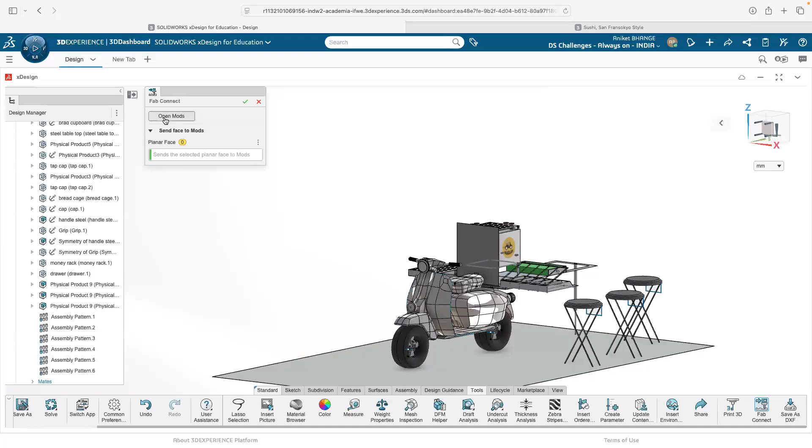Somebody has asked, can you write a code on this one? So you cannot use code, but you can use the plugin. That plugin will be here, like in tools, if you go to Fab Connect - so this is a mod. You can use your open mod conditions, and that will help you create a mod on it. I don't have a mod, that's why it is not responding to me.

Fab Connect is a tool available on xDesign, currently used to generate drawings and play with other stuff, available right now within the xDesign tool. But you have to explore how to use that with coding knowledge, and that is a little bit out of scope for the current scenario.

But if some of you guys are interested, we will discuss that tool also. Maybe once I get time, I will post videos related to that tool, like how to use the Fab Connect tool and integrate multiple stuffs - by using that tool you can connect to your machine, and it will regenerate parts and drawings according to the geometries used in xDesign. That's kind of advanced stuff, but yeah, we can do it. The codes are available on this tool guide, but that is not part of today's webinar.